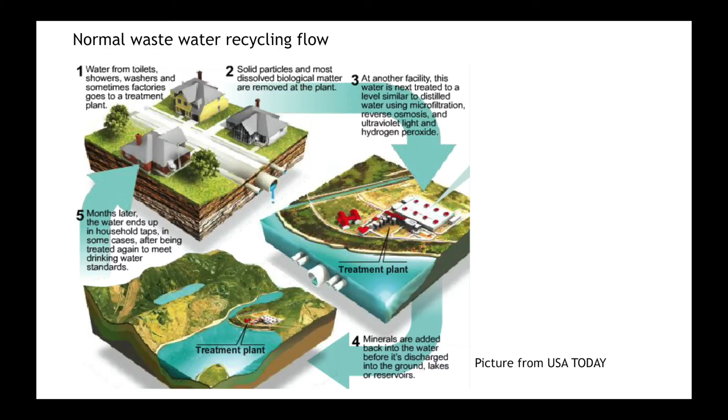This is a normal wastewater recycling flow. The wastewater first goes to a treatment plant to remove solid particles, then undergoes disinfection to remove bacteria, undergoing a lot of treatment before we can make use of it.

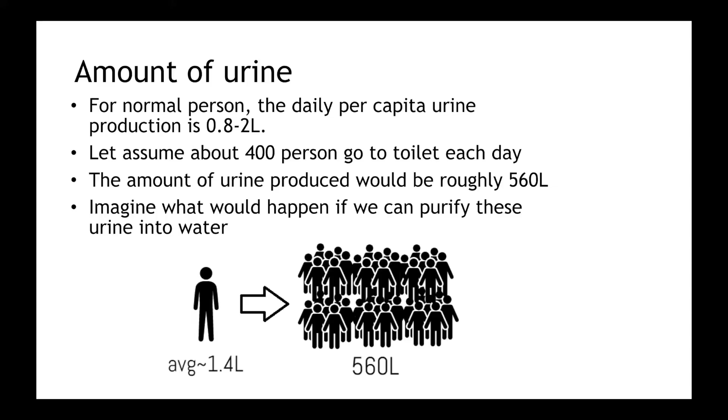Let's look at the amount of urine generated. We produce about 0.8 to 2 liters of urine per day. If there are 400 people going to the toilet per day, the total amount collected would be 560 liters. So let's compare this with the water used for hand washing.

The average time spent on hand washing is 6 seconds. The faucet flow rate is 1.5 gallons per minute. The number of times going to the toilet per day is 8 times per person. So the amount of hand washing water needed per person per day is about 4.5 liters.

If we can utilize the urine generated, the maximum percentage of water supplemented by urine is about 40%. Although the percentage is not too high, in areas where water resources are scarce, if there are large amounts of people, the additional water can save a lot.

Let's look at the energy consumption. For imported water, the most energy consuming process is supply and conveyance. Interestingly, even the energy required for advanced treatment processes, like the one in our project of direct potable reuse, is higher than that of imported water.

The difference is offset by supply and conveyance, which makes direct potable reuse a more energy effective process than imported water. Thank you, Jerry.

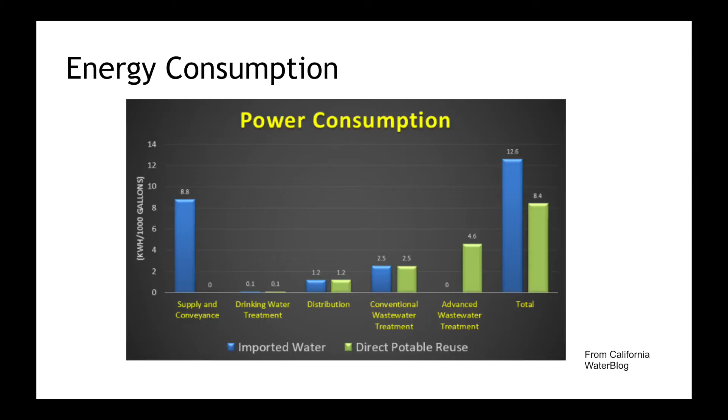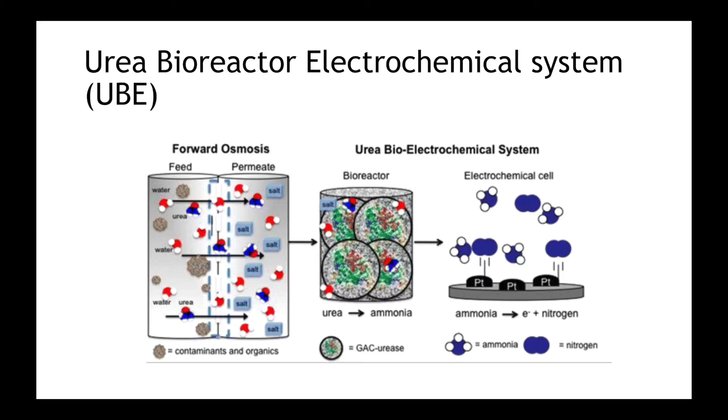In addition to the UBE system, I also want to introduce a portable device called Aqua H2O. It is useful for turning pee into drinkable water. Let's look at the structure of this device first.

As you can see, it is mainly comprised of activated carbon, a microfilter, and an osmotic membrane, which are used to filter out unwanted substances in urine.

Finally, the drinkable water can be passed by pressing on the cylinders. Users can drink directly through the spilling spout or keep it in another container. This is a portable device for water shortage areas.

But whether people are willing to drink water made from their own urine is the main concern of this device. Those are the similar technologies to ours.

Next, I will pass the time to Anson to talk more about our technology, called air gap membrane distillation, in detail. In our process design, the equipment setup is quite simple.

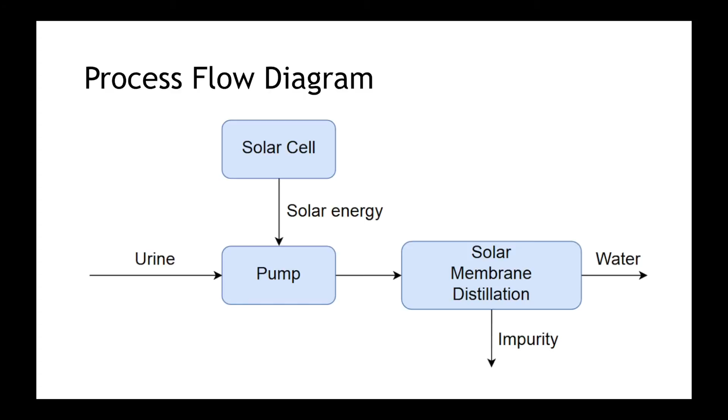So how can we purify the urine only by solar energy? The detailed structure looks like this. We integrate the solar heat exchanger with air gap membrane distillation technology to perform a low energy consumption purification. The key purification process is driven by the temperature difference of hot urine and cold urine. These two streams are in counterflow direction, and they are divided by an air gap.

The temperature difference increases the vapor pressure, leading the water molecules to evaporate through the membrane and condense at the condensing plate. This condensed permeate water is then collected in a storage tank for further application. The eluate impurity will be disposed as waste. That's the overall mechanism of solar membrane distillation.

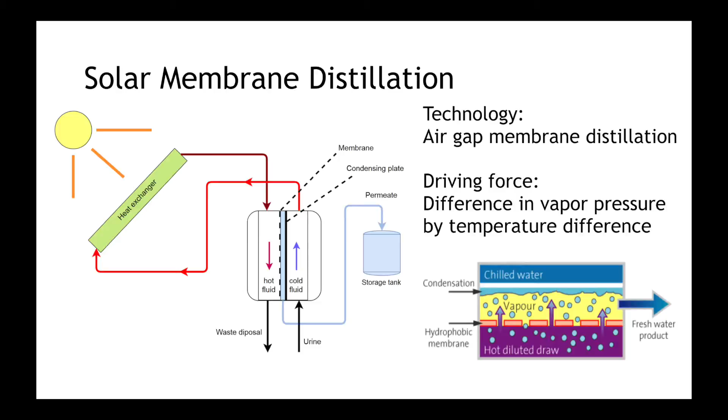Here are some detailed designs allowing urine membrane distillation. It can be operated at around 60 degrees Celsius under low hydrostatic pressure. Therefore, it benefits from the energy cost. What's admiring is that membrane distillation is not resisted by membrane fouling due to its mechanism. According to certain studies, at least 75% of available water is recovered in water treatment by membrane distillation. Lastly, the material of the condensing plate has to be high thermal conductivity to enhance the heat exchange for condensation.

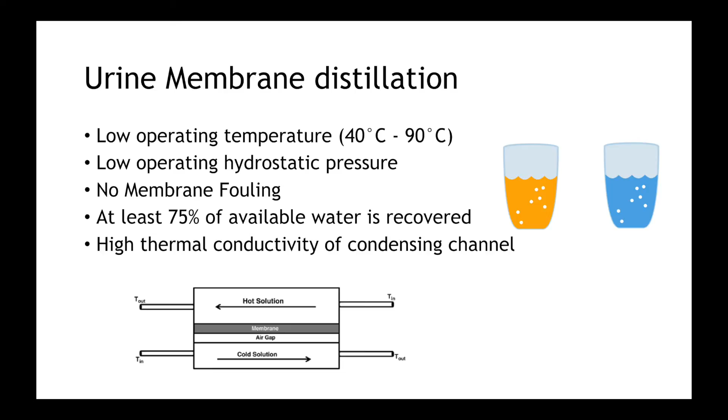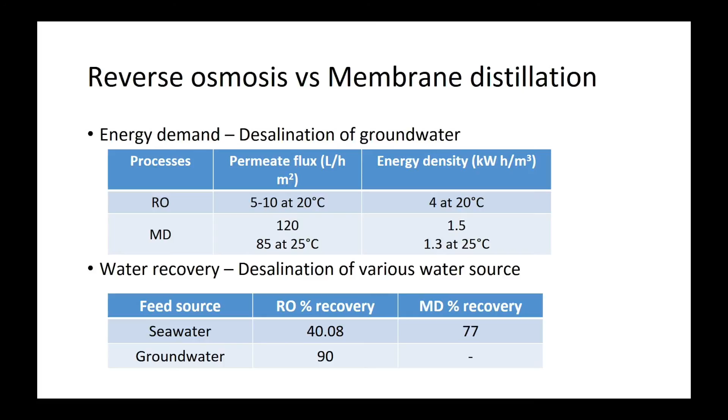You may ask, what is the difference between reverse osmosis and membrane distillation? The energy density of reverse osmosis is relatively greater than membrane distillation, about 3 times. Also, the water recovery of reverse osmosis is relatively lower than membrane distillation, around 2 times. That's why we chose membrane distillation technology for urine purification.

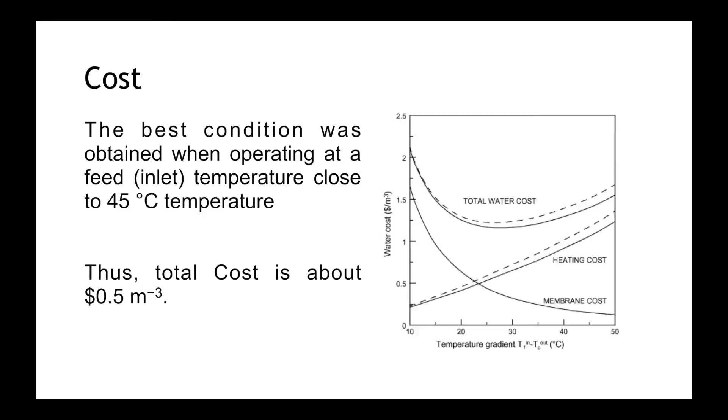Let's look at the pros. The potential advantages of membrane distillation in comparison with conventional separation processes are found primarily in the lower working temperature and pressure, and thus the lower energy cost and less stringent mechanical properties. In contrast to distillation and reverse osmosis, supply solution can be separated at a temperature well below the boiling point and under atmospheric pressure. Typically, supply temperatures around 30 to 60 Celsius degrees permit reuse of residual heat flows and the use of solar energy.

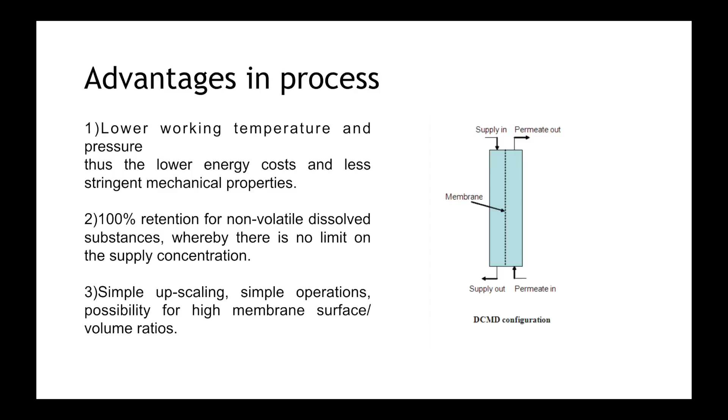In addition, in comparison with reverse osmosis, membrane distillation is less susceptible to flux limitation caused by concentration polarization, whereby a higher concentration of matter is obtained on the supply side. Therefore, membrane distillation offers 100% retention for non-volatile dissolved substances, whereby there is no limit on the supply concentration. In comparison with traditional distillation, membrane distillation possesses the typical basic advantages of membrane separation, namely simple upscaling, simple operation, and the possibility of a high membrane surface per volume ratio.

How about the quality of output water? Actually, it's quite high. The radius of a virus is about 20 to 300 nanometers, but the radius of space between membranes is 0.001 micrometer only. Hence, it can prohibit viruses from passing through the membrane.

Composition of urine. Urine is mostly composed of water, which takes up to 95% of its weight, followed by 0.05% of ammonia, and this is the substance that is responsible for the smell of urine. And then 0.18% of sulfate, 0.12% of phosphate, 0.6% of chloride, and etc. Apart from these, there are also components such as dissolved ions, inorganic and organic compounds.

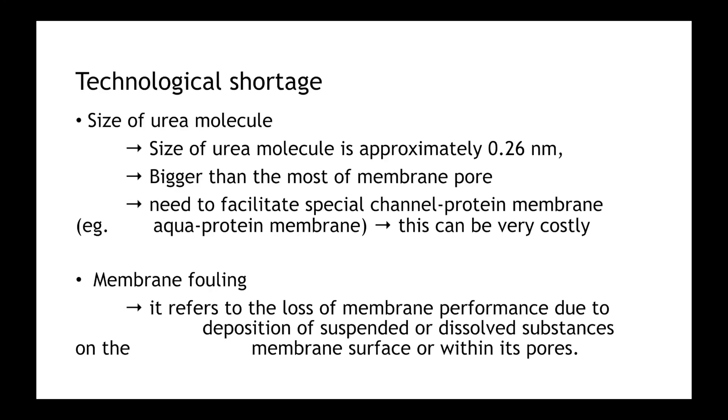Even though the membrane distillation process seems to be a sophisticated technology with no drawbacks, there are also some technological shortcomings that we need to overcome. So there are three main disadvantages that we are facing right now, which are membrane pore size, membrane fouling, and membrane wetting.

Another problem associated with membrane distillation is membrane fouling. It refers to the accumulation of material at the surface or in the pores of a membrane due to the deposition of suspended or dissolved substances. This causes the loss of membrane performance because fouling decreases the permeability of the membrane, which leads to severe inefficiency of the membrane process. It also causes improper purification of water.

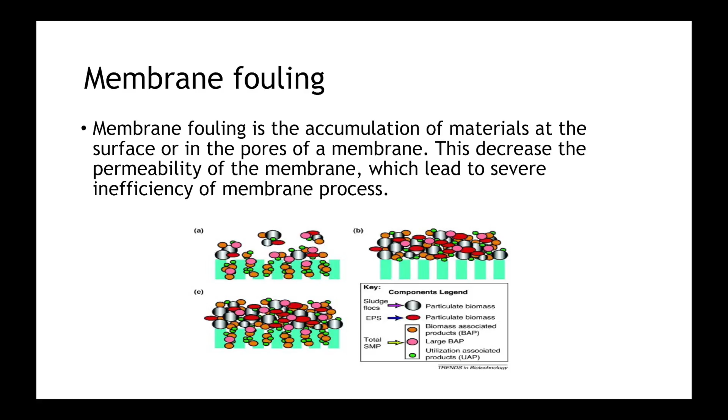In this case, urea and other dissolved ions, inorganic and organic compounds will gradually pile up on the surface of the membrane or within the pores, so it will disrupt the efficiency of osmosis.

To overcome the membrane wetting, the membrane distillation processes must be done under highly aqueous and sufficiently dilute conditions. This means that we need to put extra water input in order to make urine more dilute to prevent wetting. However, due to the decrease of concentration, the efficiency of osmosis will decrease with time.